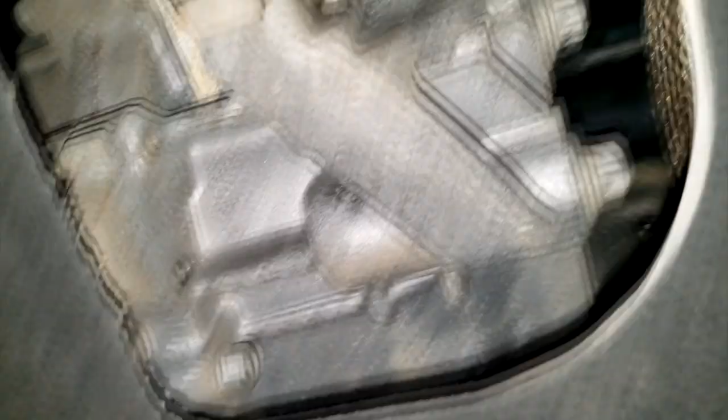All right guys, here we are again. I'm under the underbody of this Dart. Okay, now they said they replaced the crank sensor already. I know we got the P0335, and that's typically an indication of a problem with the crank sensor.

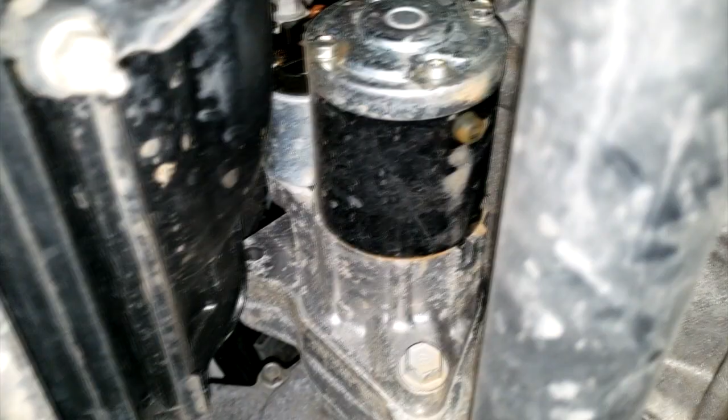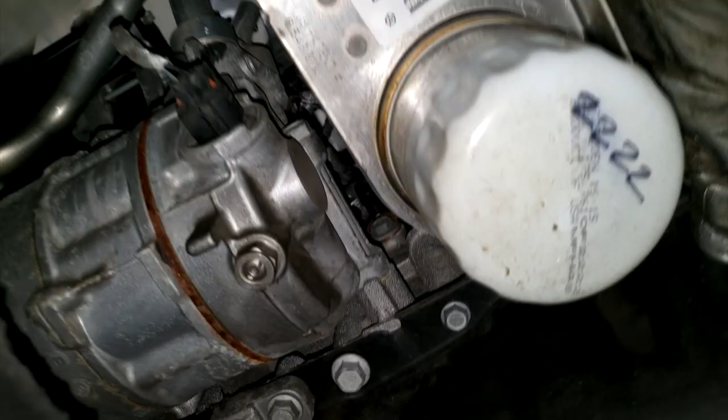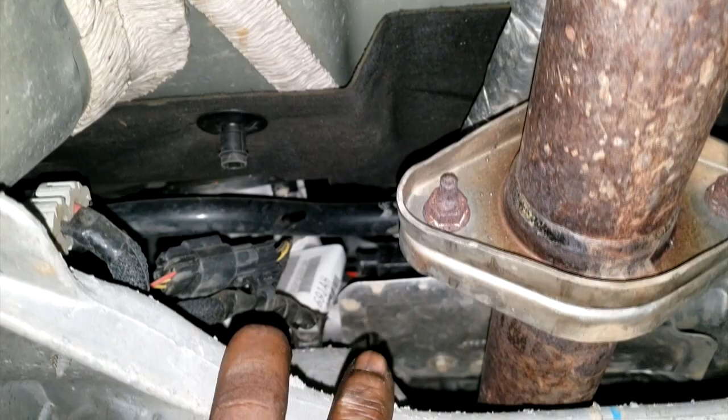Okay, so I'm trying to get a peek. I can't remember exactly where the crankshaft is located or where the crank sensor is located, but guys, I talk about this all the time. You can pretty much tell where a part lives based off of what it does. So if a crank sensor's job is to report back to the controller the turn revolution of the flywheel, it has to be somewhere in the area of that flywheel.

This cover is what really was messing me up, and I don't want to spend the time to take it off because they wanna know something fairly quick. So it must be up at top. It must be up top.

In fact, is this a 9-speed transmission? This is ZF, so I can't even see that. ZF you typically can get to from under the bottom, guys. But again, he said he had it replaced already. I'm not sure what kind he put on it.

He don't know. I don't even think he did it, he had somebody do it, or he was saying he got it done. You know, we get those customers that come in and say they want their car checked out. They're fussing at us, basically mad at the previous mechanic. Now, even though the previous mechanic may not have done anything wrong, he's basically frustrated at the world.

Okay, he got a check engine light on. He got a code for a crank sensor. He got one put on. A week later, the check engine light is back on for a crank sensor problem. So I don't know who he's mad at, but I know what I'm going to recommend, or I can't seem to get to the bottom of if it's an OEM crank sensor or a Joe Blow crank sensor. Look guys, y'all know I'm a big advocate of OEM parts, so I need to know these things, because I will not put my name on such repairs.

All right, now let me let the car back down. We're gonna go to the computer. All right guys, we are now at the computer. This is a 2015 Dodge Dart.

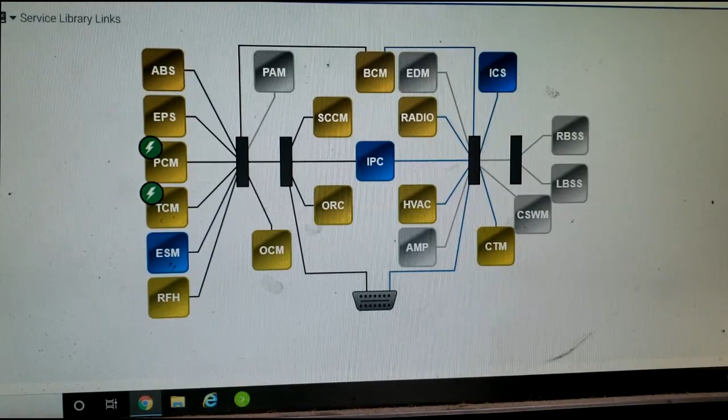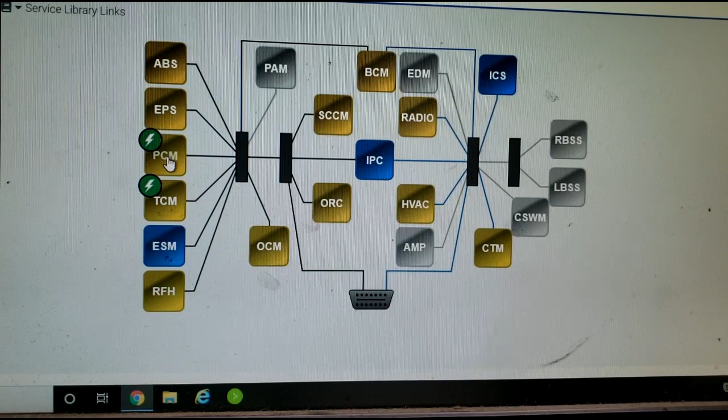Oh my goodness, look at all the yellow, guys. Yes, yellow is not good, that means trouble codes are stored in these respective modules. Okay, he's concerned with his check engine light. Check engine light functions are typically in the PCM. Let's look inside the PCM, and what we will see on the DTCs is, yes, that's what he said. He said it came back, guys, P0335.

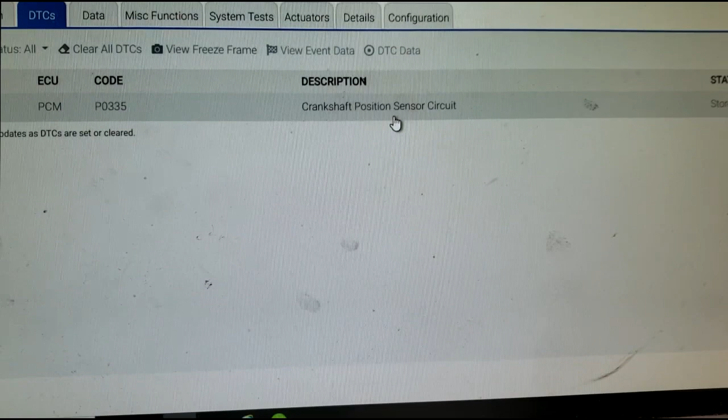Now guys, I'm not sure what kind of sensor you put on. I really don't care. If I see this code and you got an aftermarket sensor on here, you're getting an estimate for a new sensor and whatever else I think you may need. My name is on the line with my diagnosis, and I aim to protect my image. I will not go off the crappy sensor you may have installed.

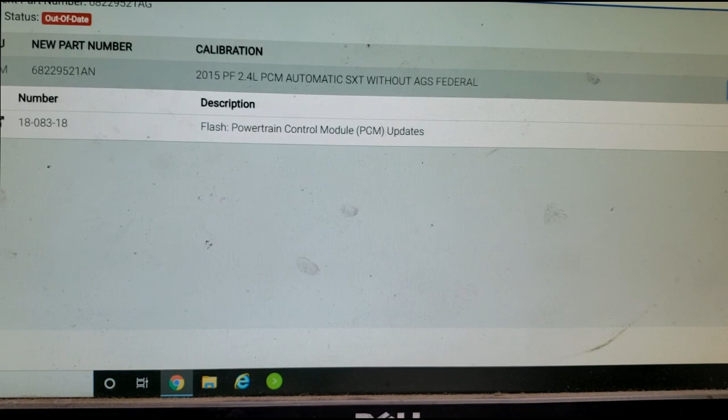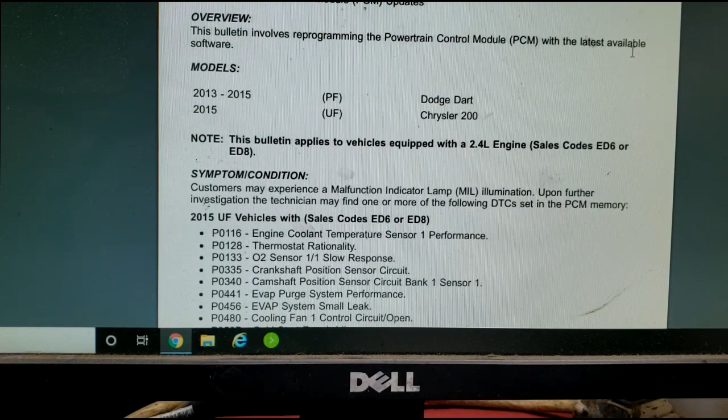Now, what I did recognize, guys, there is a flash update on this controller. Let's take a look at what that entails. Alrighty, shift improvements. Okay, this bulletin involves reprogramming the PCM for the latest available software. Yes, it applies to the Dart and the Chrysler 200. All right, customer may experience malfunction light on.

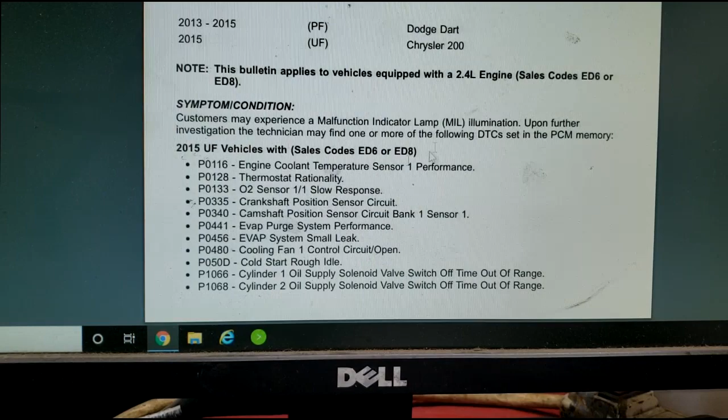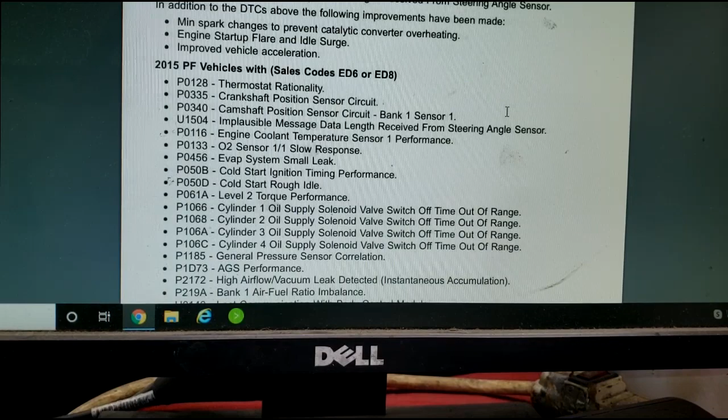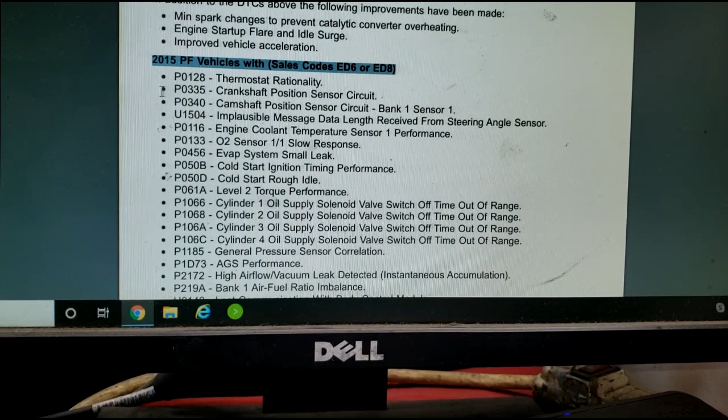Upon further investigation, the following DTC set in the memory. Okay, let's see if it's P0335 or something like that. Yes guys, what do you know, look at this, this is exactly what we're working on. 2015 with these sales codes, 2015 Dart, and look what we have here, guys: P0335. So basically, this flash update will address this trouble code.

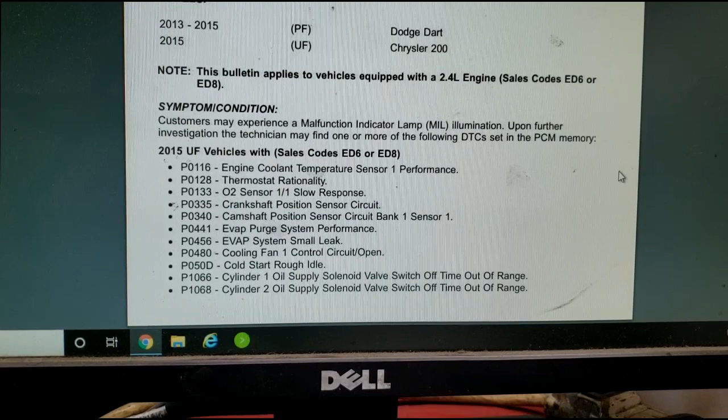So I will recommend we flash update his controller along with a new known OEM good part, guys. I can't do it like that, I have to, like I say, repair this with confidence. So that's pretty much what I'm gonna recommend, guys. I don't know if we're gonna buy it. We'll find out, and when we do, I'll get back with you guys and let you know, so I can show you where exactly it's located.